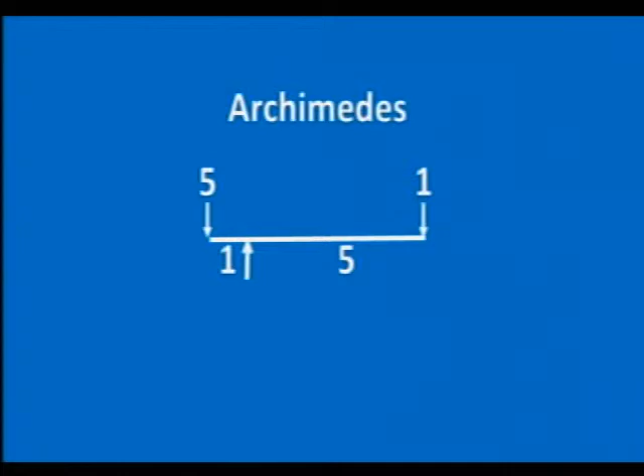If you have a lever like this, and if this side is 1, and this side is 5, then you know that if you put 5 there, you can keep it in equilibrium with 1 over there. And what do we normally think? Because 5 times 1 equals 1 times 5, right? Equilibrium. But the Italian clowns did their work through virtual work.

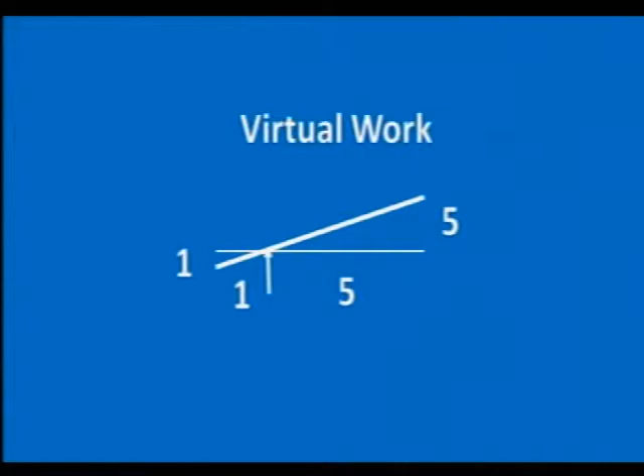If I do the same problem through virtual work, I let the rod rotate, and if that distance is 1, and this distance is 5, then the deflection there is 1, and the deflection there is 5. So if you put a load of 5 there, it'll balance a load of 1 over there. The work done simply being the force times the distance that you go through. It's the most beautiful theory, I think, in the practice of engineering, virtual work. And the Italians came up with it.

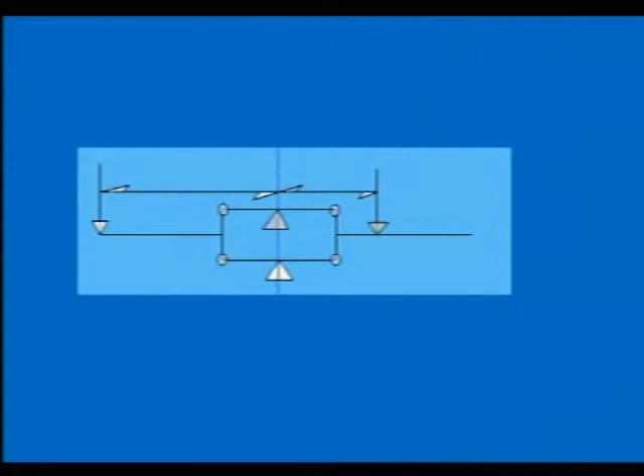Now, this is a puzzle for you, at least for those of you who haven't seen it, so pay attention. Let's see if anybody will be able to figure it out. If I have 2 beams with hinges at each end, supported simply. How do you say that in Spanish? Simple. Supported simply. And if we put a load over here, and a load over here, do you understand that? This is free to rotate, okay?

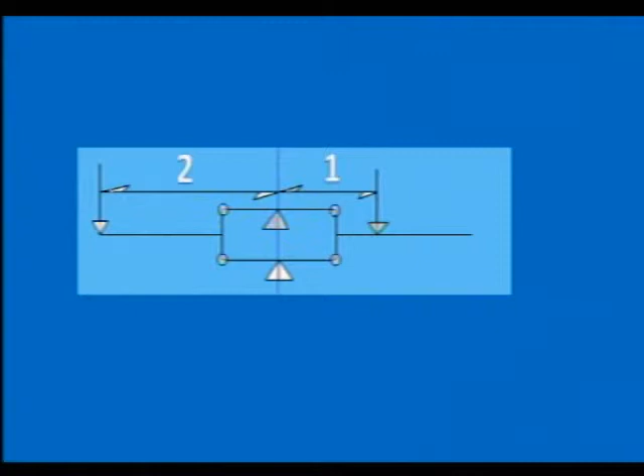If this distance is 2, and this distance is 1, if I put 1 kilogram force over here, what do I need over there in order to keep it in balance? 4? 2? ¿Qué prefiere? 2? Do you vote for 2? Yes, you got 1 supporter, only 1, and the others are 3, so 4. Hey, you win.

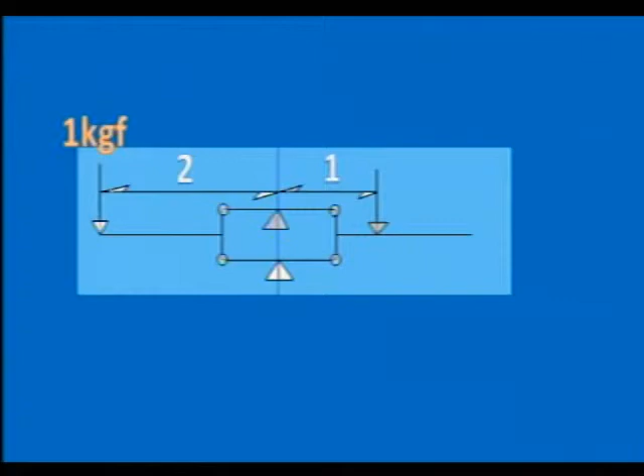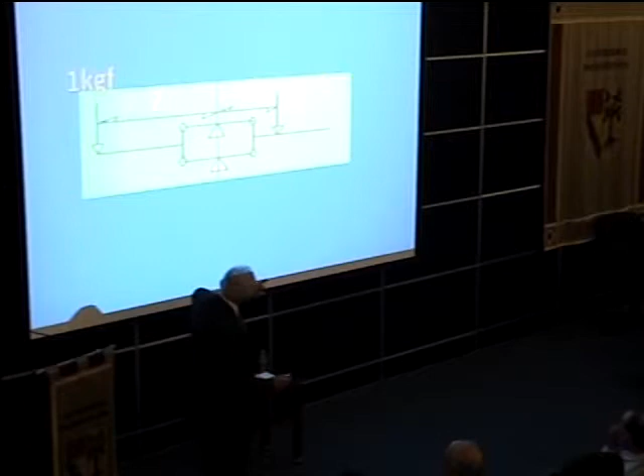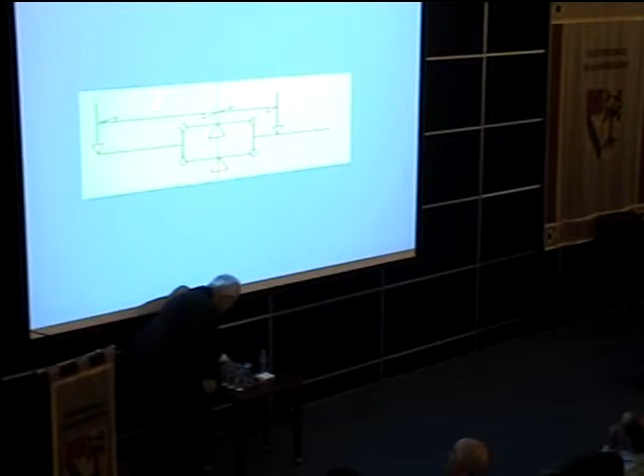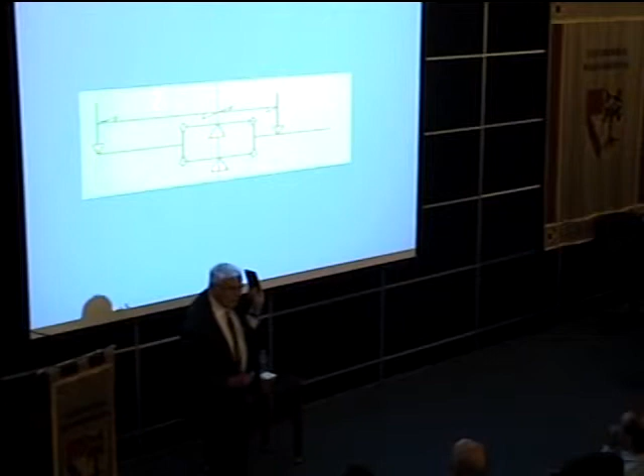But listen, think of it in terms of virtual work. That's difficult to think, but think. If I move this down 1, how much does that go up? Correct or no? I think if I move this down 1, that goes up 1. Doesn't it? Because these simply rotate like this, and that side goes up as much as this side comes down. No? Yes? If it's no, I've been kidding myself for many years.

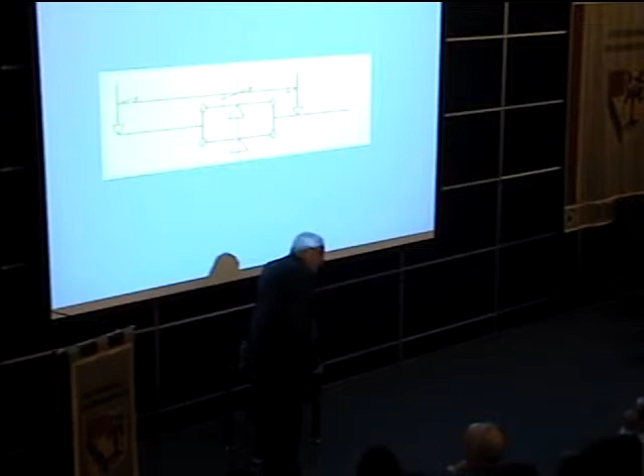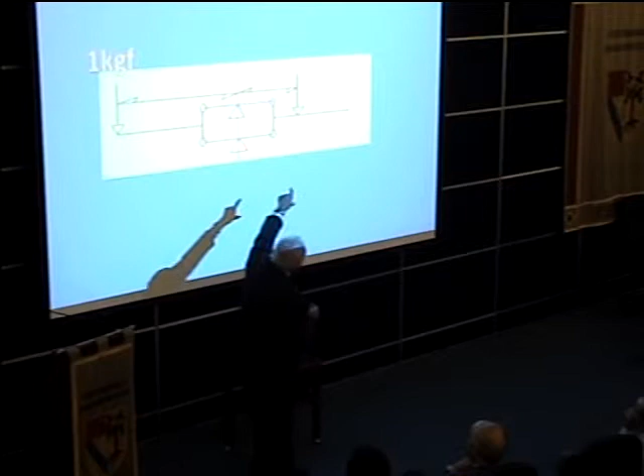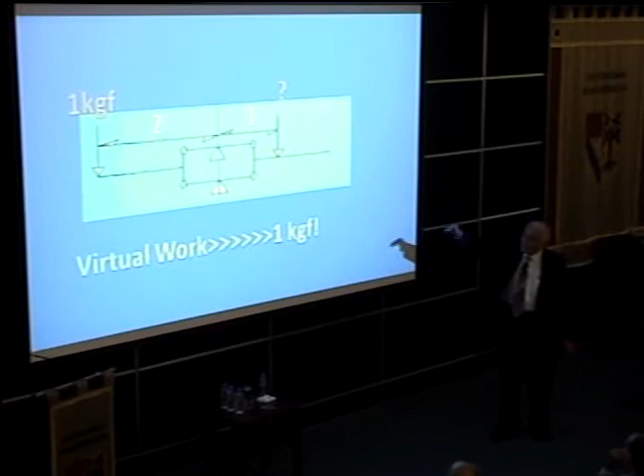And surely some of you use it when you do limit analysis, the virtual work method. Any objections to the question mark being 1 kilogram force? Does it seem odd to you? But of course, you know, there are...

Who did that? Juan, ¿qué pasa? Did I do it? Well, I'll continue without slides. Is that it? Why not? And it would happen at the most exciting part of my presentation.

I did it? Oh, something is happening. The computer is running out of, but something happened to the computer. You know, lately I've been trying to work with Windows 8. Let me give you one word of advice. Don't go to Windows 8.

We can make it look like it's a static problem. So they started talking about a force pushing a building laterally. And they didn't connect it to anything like ground motion or what have you. They said, if you're going to design, then you have gravity forces vertically, and you have earthquake forces laterally. And they said the lateral force, because they were talking about buildings that were 2 to 3 stories high, maybe 5 at the most, if you design for 1/8 or 1/12 of the weight of the building, it's good enough.

Hey, can you follow me? I'm asking myself the question. I can speak slower if you wish.

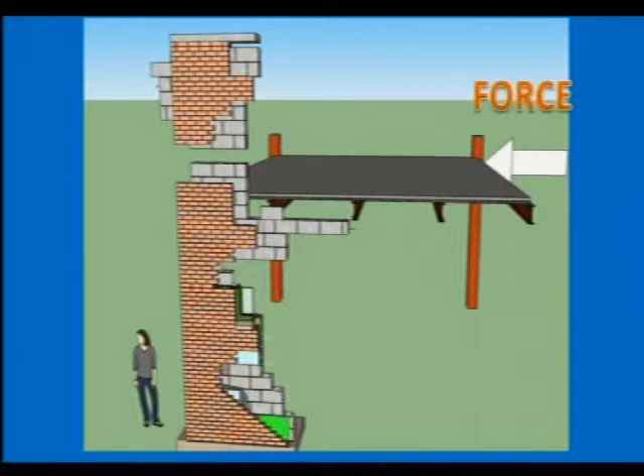All right. But they said, we'll just assume there are lateral forces. And they really didn't care how it was distributed over the height because they were talking about low-rise houses. And they made that thing. It was the Californians who were smart enough to relate that to the, you know what I mean by PGA, right? The peak ground acceleration. And in the 1950s, the peak ground motion used to be 1/3 of the acceleration of gravity. And hey, that made sense. You could sort of translate it into a lateral force.

In 1960, Professor Housner of Caltech, who was a brilliant engineer, said the maximum is going to be 0.5. It can't be any more than that. In 1971, Housner himself measured 1.25. Now it was getting serious. And in fact, I still remember the day when this was measured. We were all shocked. We couldn't believe it. Because now it was saying, well, you should design the building for almost its own weight. Didn't make any sense. By that time, we started getting smarter.

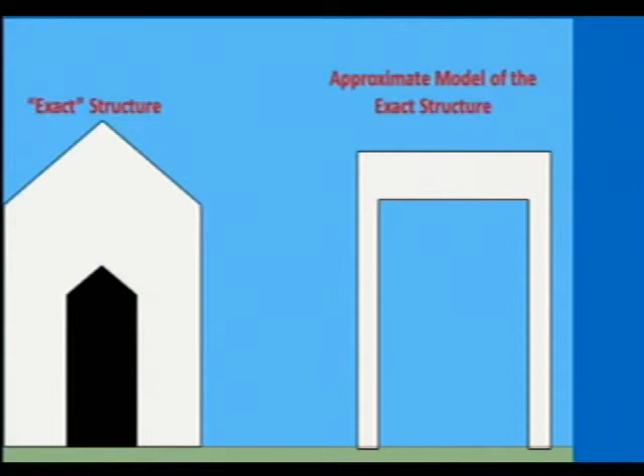You should ask yourself the question. Now, after I make the approximate model of the exact structure, then essentially I convert my approximate model to a linear spring, or elastic spring, if that is what you call it, and the mass. And then I make an exact analysis of it. Let me emphasize, I make an exact analysis of the approximate model. And do you believe it? Do you believe the results that you get?

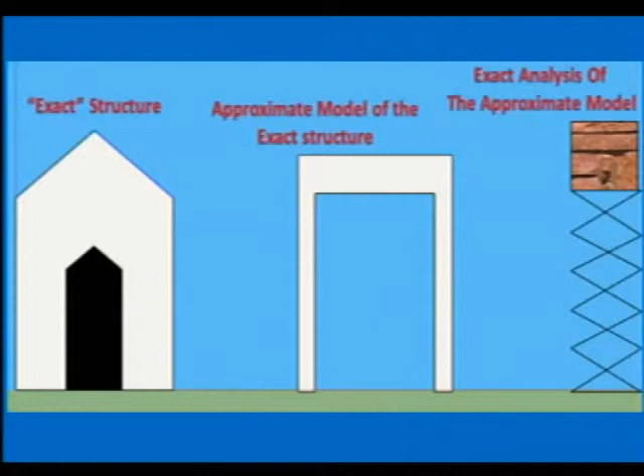And you see, this is bad enough if you're dealing with gravity load, because with gravity load, sometimes you can tell closely what the load is. But if you're dealing with ground motion, hey, do you know of any instance when we predicted the ground motion that occurred in a future earthquake? Do you know of any instance? And do you know of instances when we were totally wrong?

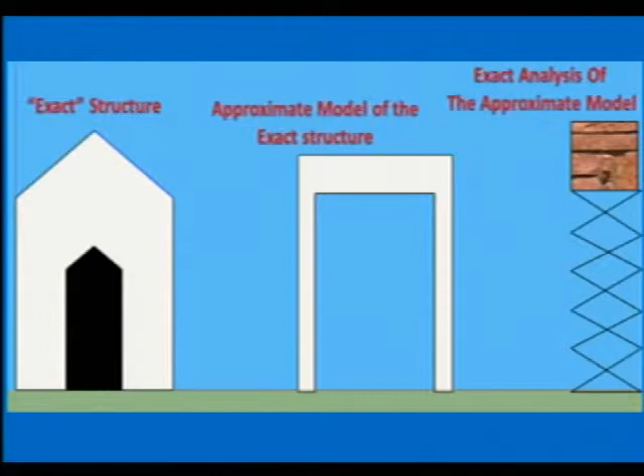So the demand that you put in here is not correct. We do it, we have to do it, but it is not correct. So it's more approximate than other types of analysis. And this is the point I want to make.

Whenever you design a building or even a road, you should always ask yourself the question: is the exact analysis of the approximate model of a structure good enough to serve as an approximate analysis of the exact structure? How close is it to reality?

You know, I have a very good friend who wrote a book on earthquake engineering. And most earthquake engineering books are not about earthquake engineering, they're about dynamics, structural dynamics. And he has in it the lateral deflection of a 20-story building that has been calculated to 1,000th of an inch. I don't know if an inch means anything to you, but it's 0.025 millimeters. Now, can you tell the difference between 0.02 and 0.04 millimeters in a building?

Do you think the building cares? But we do it. We love to make exact analyses of the approximate structure. And the structure model is approximate. Anyway, if you don't agree with me, let me know, and I'll be very happy to concede. Surrender. If you think that your analyses are exact.

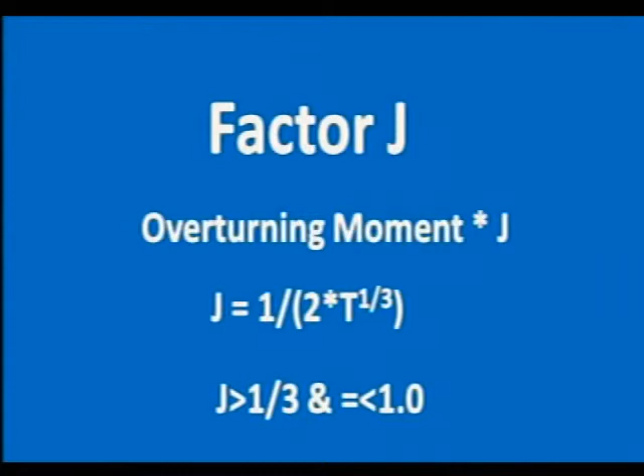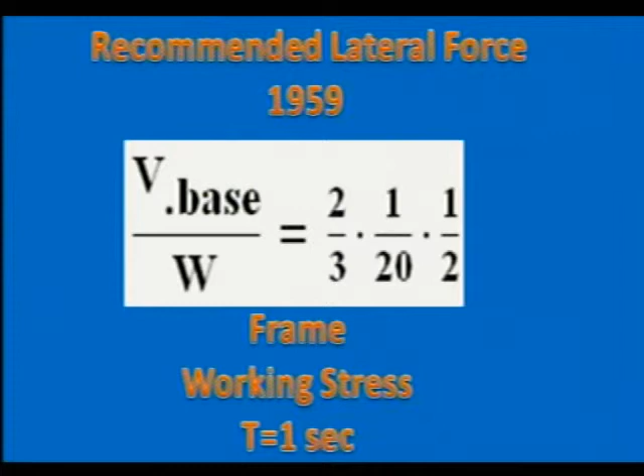And it was, of course, said to be not more than 1, obviously. Nobody would do more than 1. And not smaller than 1 over 3, but that's not important. If you had a frame, the so-called class 1, the business class frame, and you had a period of 1 second, then your base shear for calculating the bending moment became 2/3 of 1 over 20, and then you multiplied it by 1/2 for the J factor. You reduced it by 50%. It's a perfect case of not knowing what we didn't know.

Now, the Caraqueños said, hey, the gringos must be smart. And you think gringos are smart too, don't you? You admit it to yourself. So they said, hey, they must know what they're doing. So they followed what the California Code did. And they built many structures. It was a good time economically. And they believed it so well.

Hey, let me give you a perfect example of not knowing what you don't know. Look at this. Look at the change in the size of columns. What does that say? That says that the engineer who designed it believed implicitly in his computations. Don't ever do that for earthquake engineering. Don't ever believe your numbers in that respect. But they did this, and what is more, when they had a 21-story like this one, they used very small corner columns, 25 centimeters, 250 millimeters by 250 millimeters.

Hey, do you use centimeters? Because the French tell me that's gone. There's no such thing. But anyway,

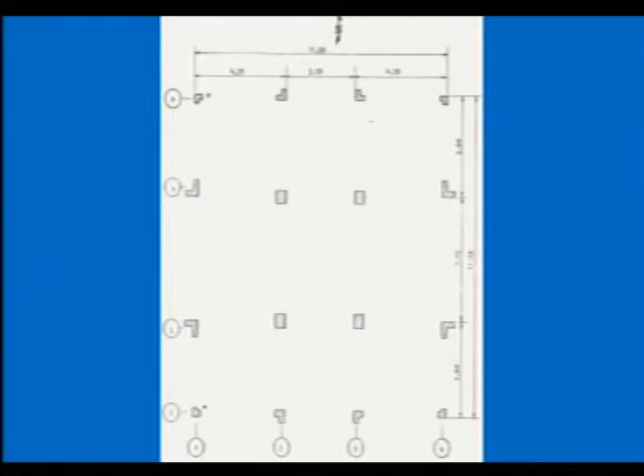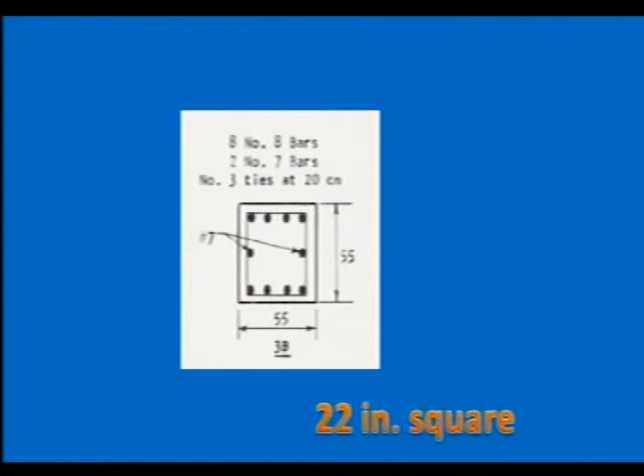25 by 25 centimeters because they reduced the overturning moment according to what the people in California reasoned. I mean, even their center columns were like 55 by 55 centimeters. And this is what happened. Fortunately, this building didn't go down, but 3 others did, completely. And because of not knowing what they didn't know. And it wasn't their fault. They looked to California and said, hey, them cats know what they're doing. Let's follow them.

Here's another one. Another one. And I can't show you the pictures of the other buildings because they were completely gone by the time I went there. But it's a perfect example. Now that we're finished with that, let's talk about something else. And I am not being an anarchist, I assure you. I want you to calculate things exactly and do everything the right way.

But, you know, Professor Paolo Montero and I were arguing about this. He said the Borgia Popes were Italian. I said, no, they were Spanish. And we went through a big argument until we were able to look into the internet and find that they were indeed from Valencia. Of course, you shouldn't be proud of it. They were very strange people.

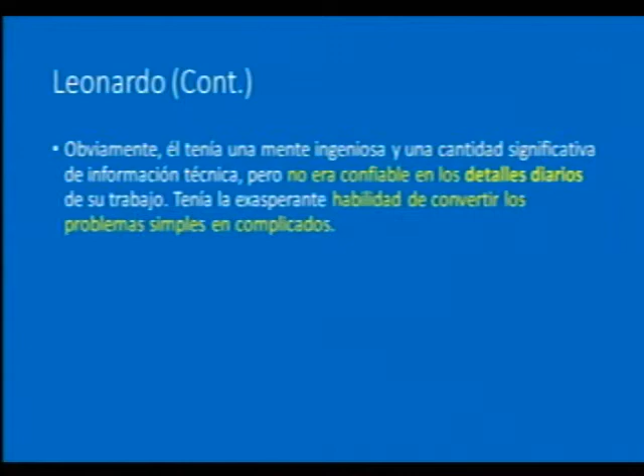Now, this is where the engineering definition comes, and I love it. He says that he wasn't reliable in the day-to-day details of the work. And he made simple problems complicated. You see, if you want to be a successful engineer, first, you have to care about simple details, like screwdrivers and nails, what have you. You've got to look at detail, as you would in a car. And you should make things as simple as they can be. Or as Einstein said, no simpler, but as simple as they can be made.

Look, you must have heard the statement that if you're going to be wrong, you should be wrong the easy way. And I hate to tell you that, but in almost everything you do, you're going to be wrong, because we don't know everything, especially in earthquakes. So you should make your calculations as easy as possible. The result of the work divided by labor should be optimized. Again, I bring this up to you, but this time in Spanish. If you're going to be an engineer, you should always ask this question of yourself.

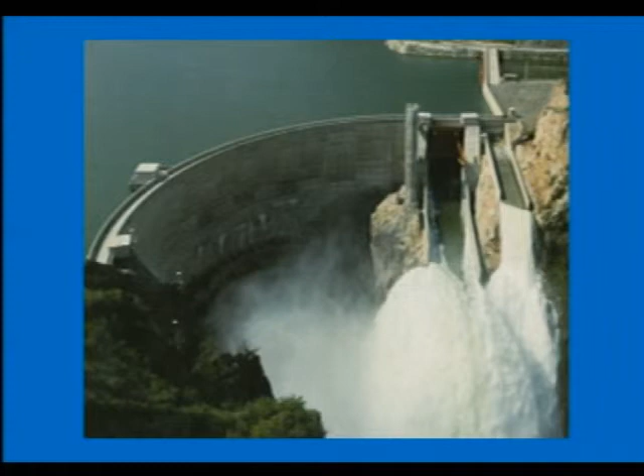Let me give you an example that I admire. Nathan Newmark was a brilliant engineer, and he made an estimate of the slip of a dam. Do you realize what a complicated problem that is, the slip of a dam? I mean, if you have a structure like this, sitting on, let's say, soil, how much will it slip in an earthquake? Now, look at what he did.

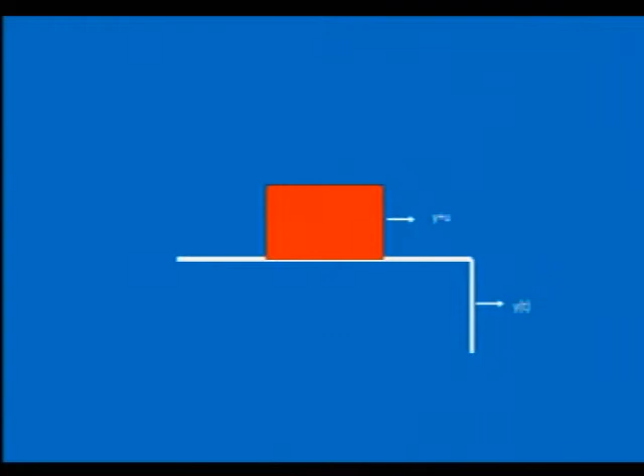He said, this red chunk models the dam. That's the ground. The ground moves according to y of t with time, and this moves relatively at a different rate. And that's the slip, right? So far, it's exact. See, this happened in my student days, and I remember it well. When he was discussing it, he said, let's assume that this is the earthquake. That's the earthquake, constant acceleration over a period t sub o.

As naive as I was, I raised my hand and I said, sir, shouldn't you at least make it sinusoidal? Make it look more like an earthquake? He said, that's dumb, and that makes it complicated. So he assumed the earthquake, the ground motion record that we fight over, to be that rectangle. Now, if that is so, if you look at the velocity of the ground, then it increases constantly at a steady acceleration, and then when it comes to time t0, it stops.

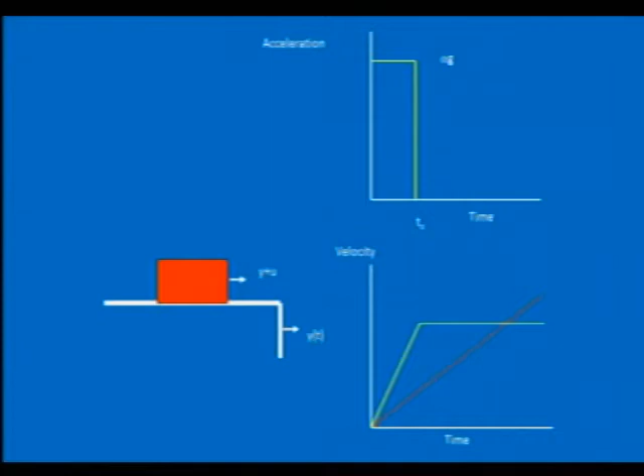The red body, of course, is activated by the friction between it and the ground. And usually the friction is less than the ground motion, so it goes up like this. And here they meet together. Now look how simple it is. At time t0, his earthquake stops, because it's one rectangular wave. It's like a cartoon. At time tm, the dam catches up with the ground, because the ground is moving faster and the dam is trying to catch up. So the difference in these two triangles is the slip.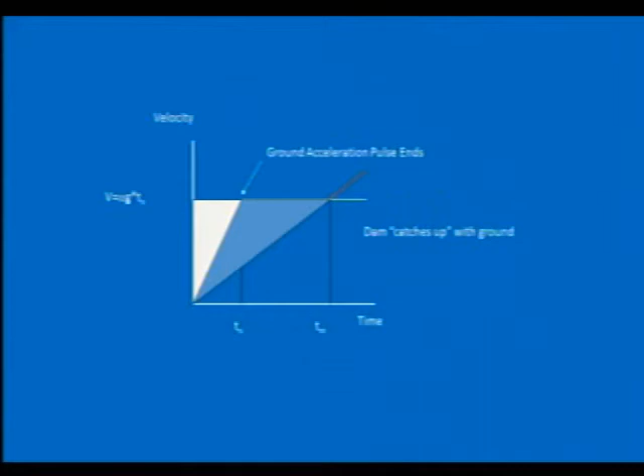And look at how he calculates it. Even there, it's genius. He takes the area of this triangle, which is very simple, right? It is the velocity times Tm divided by 2, and he subtracts from it that one, which is the velocity times To divided by 2, and he gets this expression. You know, this expression has received much criticism by a lot of very smart people. And they said, oh, this is too simple.

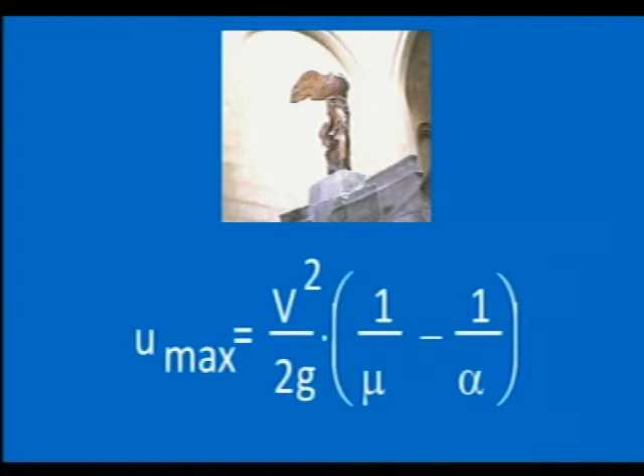But listen, how well do you know the friction? How well do you know the friction in a case like that? How well do you know the ground motion, the PGA? Very approximately. Well, if they're both approximate, if you're going to be wrong anyway, you should be wrong the easy way. And I think of it as a victory of the human mind. You know what? I came across 2 papers in the last 3 years criticizing this, saying it wasn't exact enough. How can you be more exact about friction and about the PGA? Well, it's a perfect example of making things simple.

You know, I told you my story of Mexico City. I came to Mexico City the next day, and I went to the embassy, and nothing was wrong. The embassy was hardly touched, and I was relaxed. And the reason we had lost contact with it was that the Pino Suarez building had gone over. And the embassy communication equipment was on top of this, and I could have committed suicide before I came to Mexico City, and it would have been for naught.

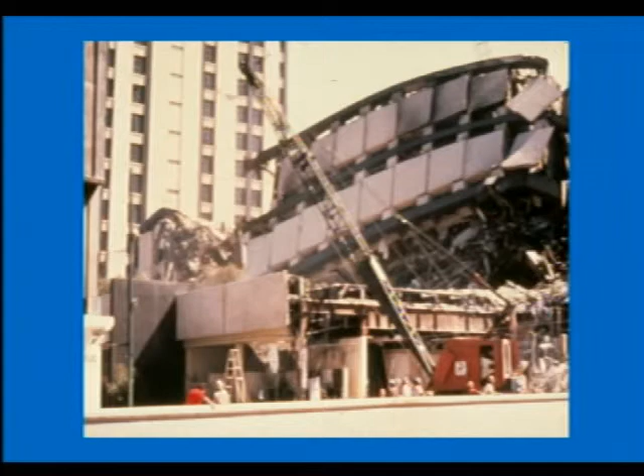Now, here's another interesting thing, and that is probably the most important thing about safety in earthquakes. This was one of the columns that sort of survived at the base of the Pino Suarez. I think you can tell what happened here. The welds gave way. I happened to be there with some prominent engineers from California. They looked at it and they said, Mexican workmanship. It'll never happen in the United States. It wasn't 10 years afterwards. In the Northridge earthquake, we had the same problem.

And you know, I'm not exaggerating. I was there with a bunch of Japanese engineers. They looked at the American errors in welding and they said, it'll never happen in Japan. 6 months later in Kobe, they lost a series of buildings because of welding. But anyway, the point I'm trying to make is not that. If you're interested in saving lives, if you're interested in life safety, you've got to watch the detail. And you know, in a way, my heart goes to this engineer.

Because can you believe, if you're in the responsibility of building a 21-story building, can you go and check every effing weld? But don't forget, between you and the finished product, there are many people, and they all have to do the right thing. And if they don't, it's too bad, because you are to blame. So you have to care for detail. Now, with that,

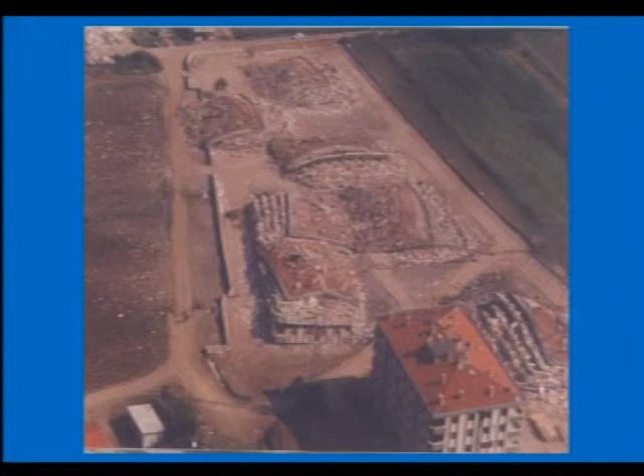You need to know only 2 rules, 2 simple rules. The first one is to maintain the elevation of the floors. You don't want this. You don't want that. You want your buildings to be like this and not like those nearby. You want the floors to be at the same elevation after the earthquake as they were before the earthquake. You don't want that. Nor this.

But let me ask you, what should you do in order to avoid this? Do you have any idea? Is it more careful finite element analysis? No, it is simply tending to detail, making sure that your connections work well, that your transverse reinforcement is in the right place, that your welding is acceptable. But please, allow me to repeat it again. To avoid this, you have to care about detail. It has nothing to do with analysis. Nothing. Believe it or not.

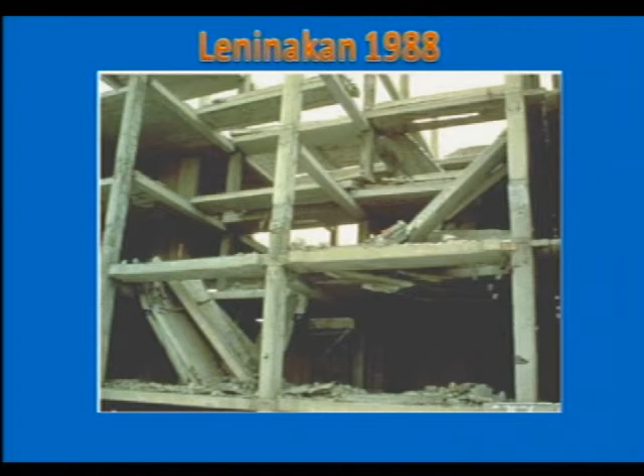Now, the second rule is to maintain the shape. And why this rule? It's because you want to save the investment, the money. You do know, as Thorstein Veblen, an American economist, said, engineers are caught between the bankers and reality. And they have to somehow tend to the structure, but they also have to please the bankers. And this doesn't please the bankers. If this happens to your building, you lose the investment, although you save lives.

Here again, and this was a very interesting case. This was the Olive View Hospital in Los Angeles, in 1971. Look, it was a simple detail. It had nothing to do with analysis. The frame was filled in by unreinforced masonry walls. That meant that whenever there was a spectral displacement, all of it was concentrated at the first level. Now, the fortunate thing is that, and we'll have to talk about this again, he used spiral reinforcement in the columns. It is something you can't really afford to do anymore.

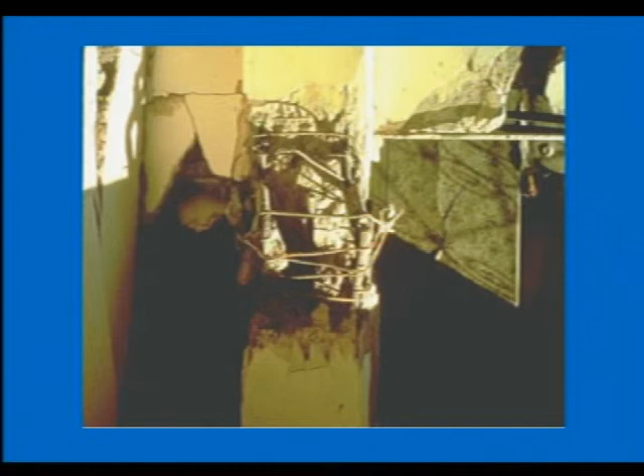But allow me to repeat, the critical issue for saving lives is not analysis. It's taking care of detail. And taking care of detail depends on experience and experiment. It depends on looking. You don't want that in a building that you design. The critical issue for rule number 2 is very simple analysis.

And am I running over my time? How much more time do I have? Another half an hour? All right, and then I'll skip the videos if you want. And I will talk to you about the simple analysis. And let me also try to tell those of you who are sleeping next to you, in about 5 minutes I'll start something very useful that they will find useful rather than this talk. Thank you. Thank you very much.

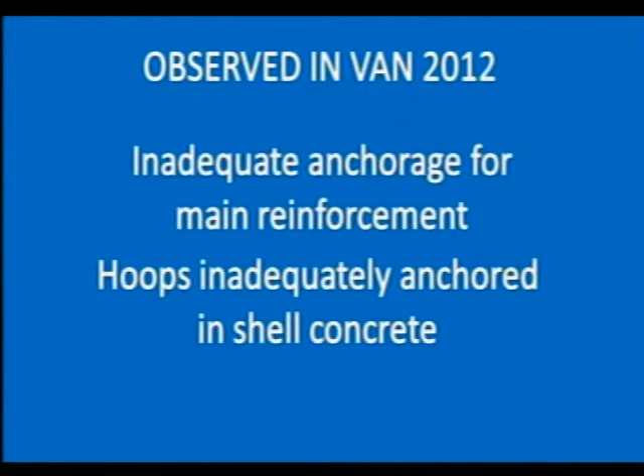For example, there was an earthquake about 2 years ago, and there was a lot of damage, a lot of fatalities, but why? They were for inadequate anchorage for main reinforcement, or hoops inadequately anchored in shell concrete. These have nothing to do with calculation. Bottom bars not anchored. Top bars extended into the joint, outside the column bars. All low-down detail, but you're responsible for it, and you've got to be sensitive to it.

The so-called captive column, which was first observed in Macedonia in 1963. It happened in Japan also. These things don't show their ugly head in analyses.

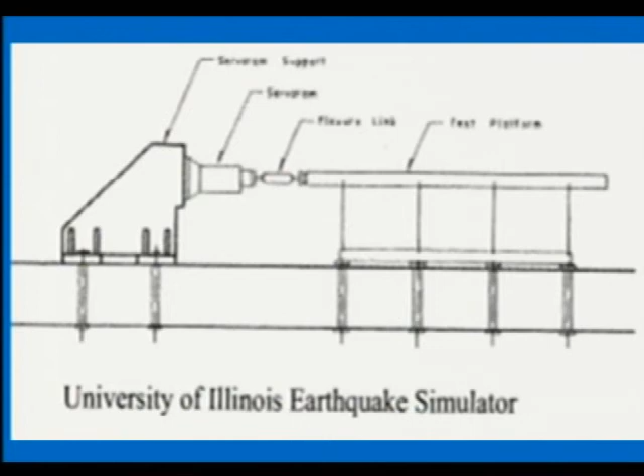It's the story of the University of Illinois earthquake simulator. It's a very simple toy, measuring about 4 meters by 4 meters, and activated by a pump that was sophisticated enough to simulate one component of ground motion. It was really a toy, nothing else. Now, it was built in the late mid-60s, at which time Newmark's opinion of calculating the linear response and dividing it by 4 was the dominant thinking. And the whole idea was when determining the lateral forces. That's what we were interested in.

The first series of tests were done on some very simple specimens by Dr. Takeda. He took these, put a weight on top, and put them on the machine. And now listen, you're looking, and you're seeing the force displacement relationship. It isn't linear and then plastic. It is not. But you interpret it as that. And hey, for those of you who are awake, let me say this very interesting thing. Not only that, but you take this system and you shake it to, say, 0.5 G, and you get a deflection of 1. Then you double the ground motion, and you get a deflection of 2.

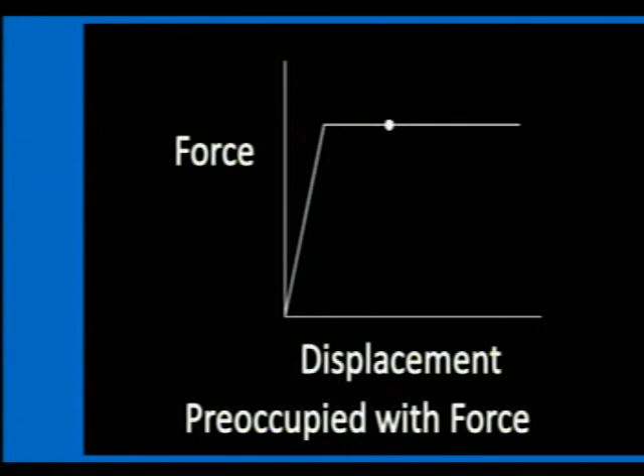But if it is force, then the minute it goes above that point, the whole thing should collapse, right? You can't apply a bigger force, but I'm there and I don't notice this because I'm preoccupied with how to calculate the force. And indeed, that's what my problem was. I wasn't seeing what I was looking at. Dr. Takeda actually produced a wonderful hysteretic relationship for reinforced concrete that is still used in Japan, in Europe, and elsewhere to calculate the response. But our fixation was on how the force was being reduced. It was the Newmark principle.

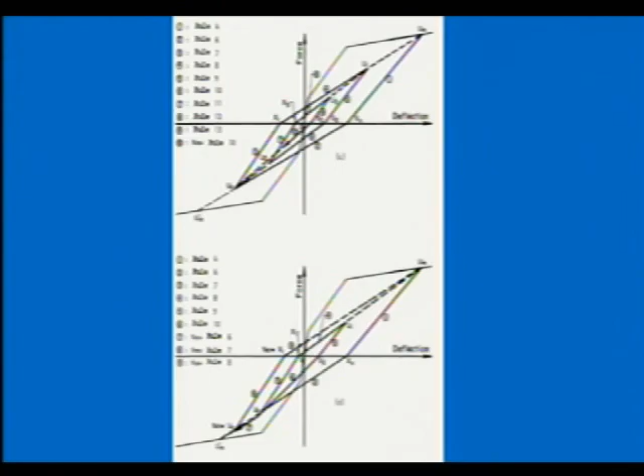Then comes another engineer. He tests just one-story frames like that. And he finds, and again, thinking Newmark, this is the ductility, the maximum deflection divided by the yield deflection. Actually, it's irrelevant, but anyway, that's what it was at that time, versus what he called substitute damping. The damping that you would need in order to be able to, and I'm sorry, I'll use the word retro-predict, the ground motion.

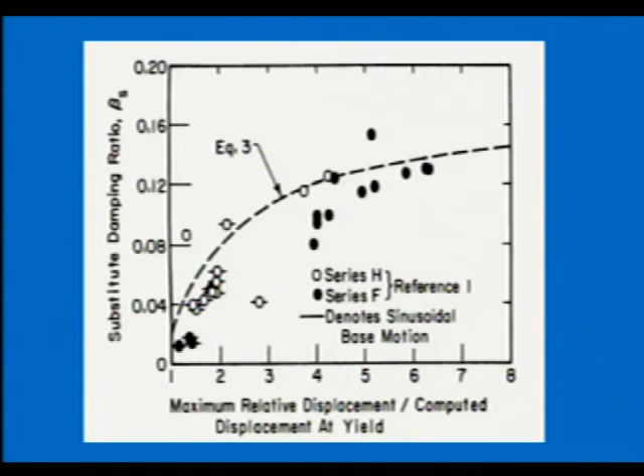And it was found that as you shook it more and more, the equivalent damping increased, whatever damping is. You know, I've been working in the earthquake business for over 40 years, but I still don't know what damping is exactly. I have to think of it every time. But the substitute damping, I should have seen it right away, but I didn't. If you really put an earthquake motion, it went from about 2% to about 10%. In fact, look, no matter what happened, the equivalent damping, the apparent damping, was about 10%. You know, what these tests said, and I, dumb, didn't see it, is that if you have even a steel or a reinforced concrete building, and you shake